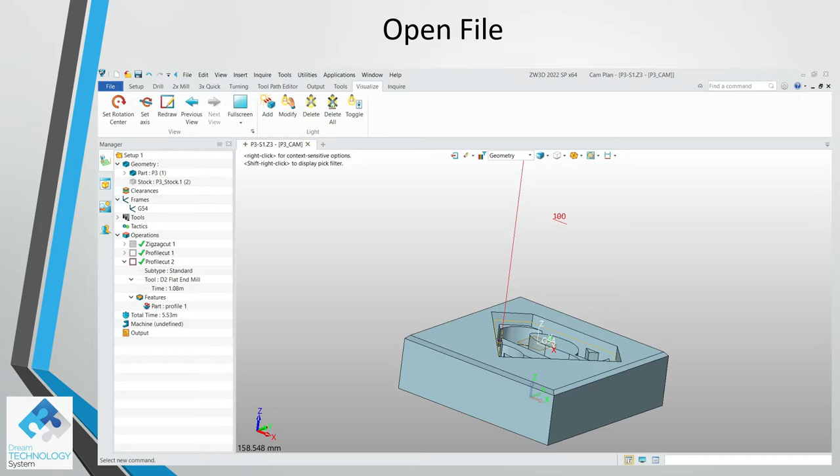As usual, we need to open the previous lesson file and continue what we're going to do today. So this is a result on the previous lesson. We have trimmed the diamond shaped logo to be a thinner wall so that we can have a bigger tool to go into deeper area to cut the profile. We have to hide the previous operation and collapse it, create a new one by using a profile, and we're going to create a new profile for it.

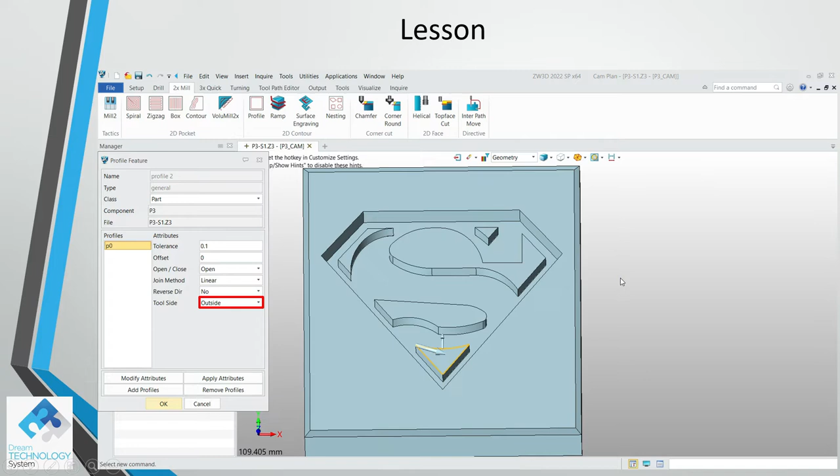So use create and select profile, then follow with OK. Need to select this 1, 2, 3 curve to produce the profile for our next operation. So click OK. Follow with that, we need to select the outside because we need to cut the outside area as an island. So we click OK with that. Continue to use the diameter 3 flat end mill because that would be able to cover the circumference of the island. So we use the same tool.

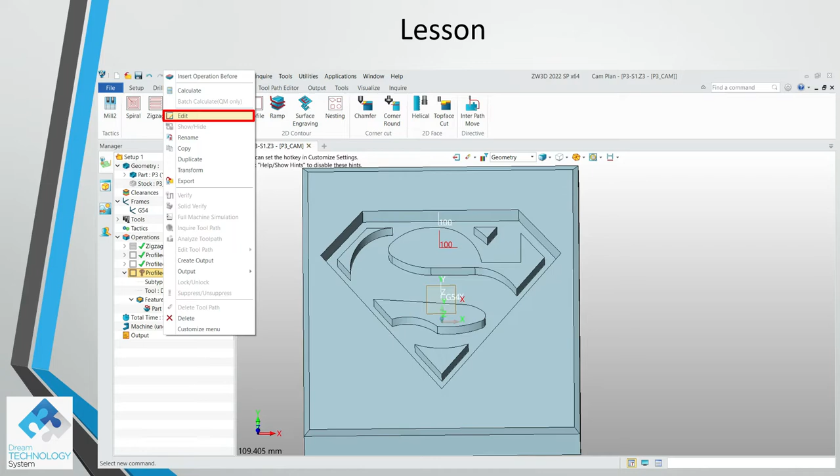Edit with the right click mouse to do the parameter update. Okay, so we need to set the G54, the first thing on the frame. Follow with the RPM, I just set 1200. The top area is -4 because we have pre-rough out the top portion. We balance 1 mm, so instead of 5 become a -4, and select the bottom area for the ending area for the Superman logo. We follow to set the side thickness to be 0.5 and the bottom is 0.5 so that the finishing tool is not going to take a lot of material out of it. Uniform depth is 3.

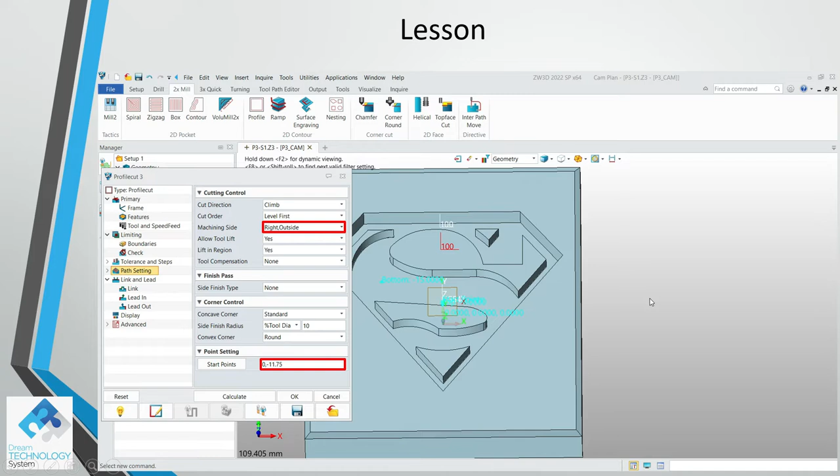We're going to cut the outside, and as well as the starting point we need to put 0 minus 11.75, easier for the tool to maneuver in the area of the triangle, almost like a triangle at the bottom of the Superman logo. We set the lead in, the engage, as well as the retract as 3, 0, 3 and 0, 3 and 0. Choose a color of magenta and then we do a calculate. With that, we take a look on the result.

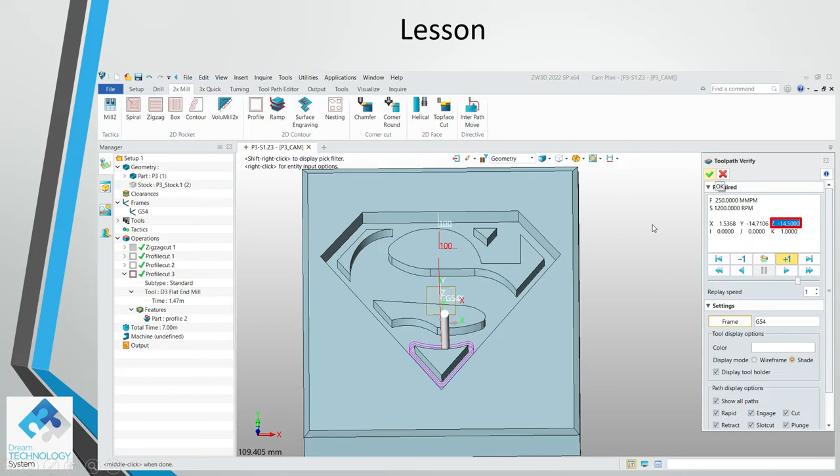Seems like okay, so we want to do a verify, and the first step is -7, which is correct because -4 to -7, so actually is 3 mm depth, and follow to the last one is supposed to be Z minus 14.5 because the total depth is 15. So we're happy with that. We click OK and then follow with this OK and perform a solid verify.

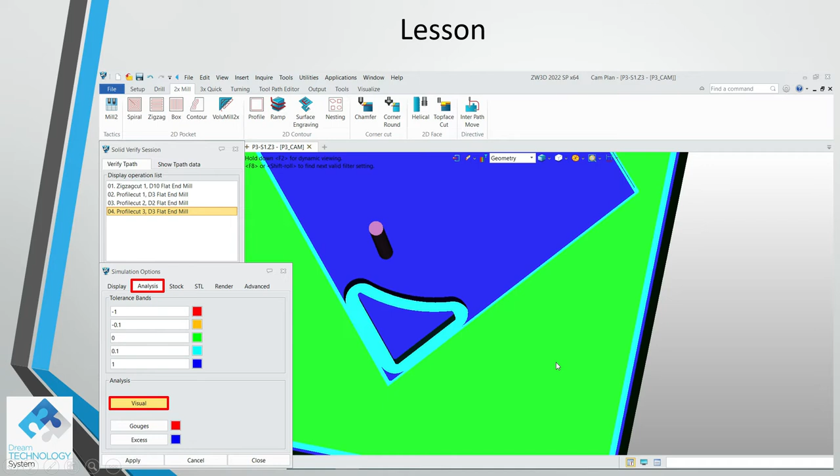Seems like the wall thickness is okay because there is still room over there, and we want to see how is the result on the analysis, and looks good on every area. So we just do a visual on this and follow with the closing. Okay, so happy with that. We just save the file for the next lesson. So let me switch the screen to show you the step-by-step how to accomplish the task.

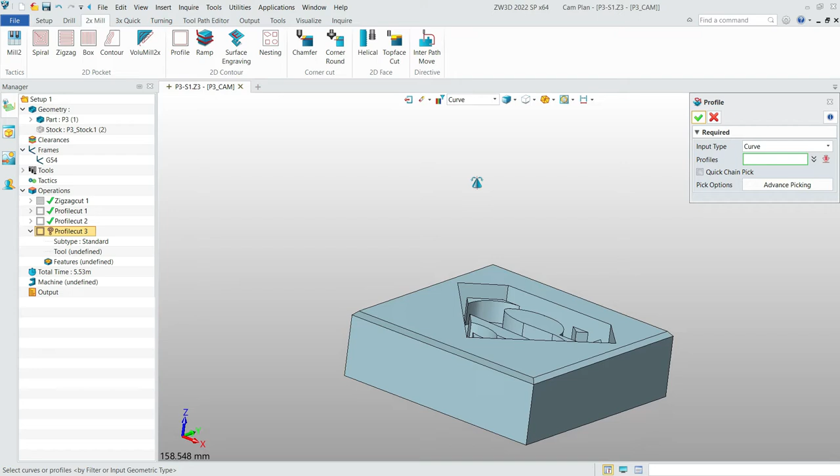Hello, welcome back. Let me show you step-by-step how to accomplish the task. First, we double-click the previous operation, collapse the whole operation, start with the profile, and we're going to create a new one. So select profile and click OK. We need to tilt the part to be a better view, easier for us to pick. So we need to click 1, 2 and 3. We click OK. Select the direction is gonna be outside for the tool side.

Click OK. Select diameter 3 flat end mill. Follow with the parameter setting by right click of the mouse and click edit. Set the frame to G54. RPM is 1200. The boundary top area is -4. The bottom, we can pick the bottom, which is -15, correct. Tolerance wise, we need to set 0.5 for the wall as well as the bottom, and the uniform depth is 3.

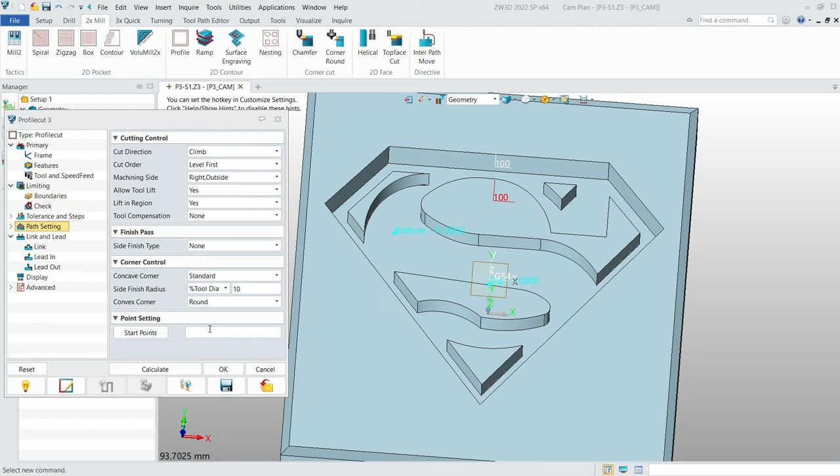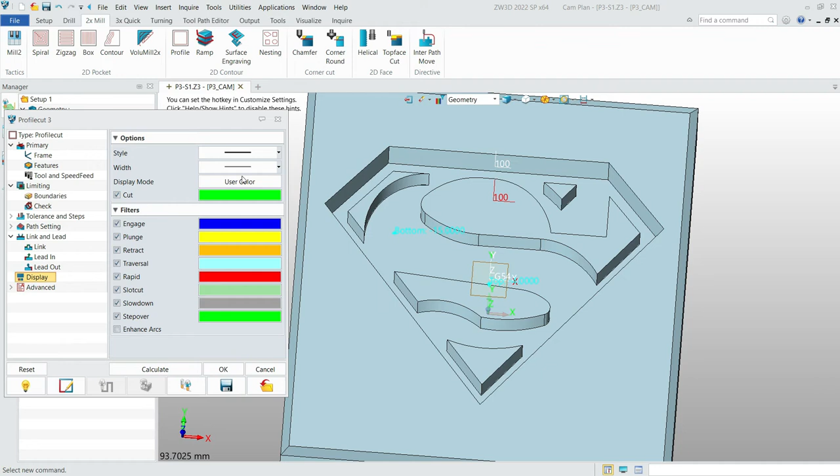We need to change this one to outside, and we need to set here 0 minus 11.75. With that, we need to change the lead in and lead out, which is the engage and retract. We put 3 and 0. This one as well, 3 and 0. Display, I'm going to choose a different color, magenta. After that, we do a calculate.

Everything seems good. Let us do a verify. Set the frame to G54 and slowly bring down the tool. First is Z minus 7. Then we continue. The second is minus 10.

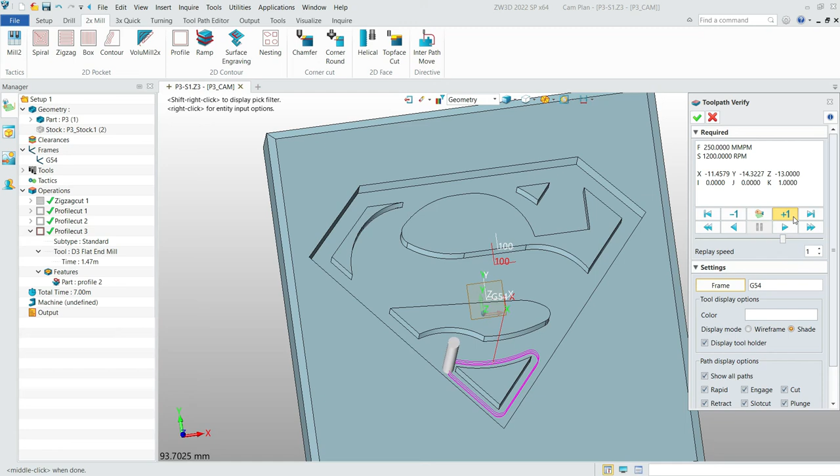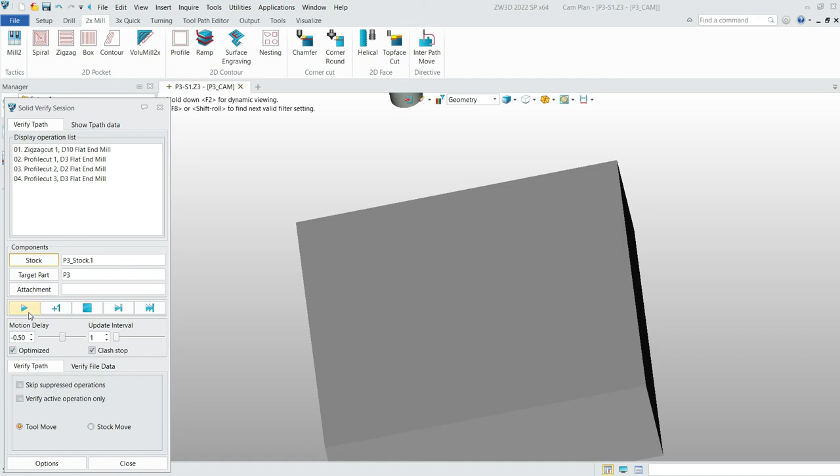We're going to perform a solid verify so that to ensure everything is correct. So I'm going to do an adjustment on the speed. Let us see how it goes. Looks good on the area. So let me do an analysis visual.

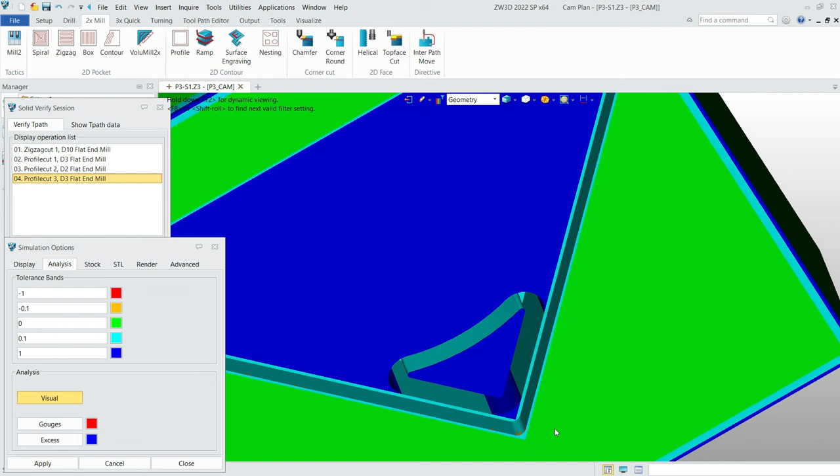Okay, we're happy with that. So we close this one. We save the file for the next lesson.